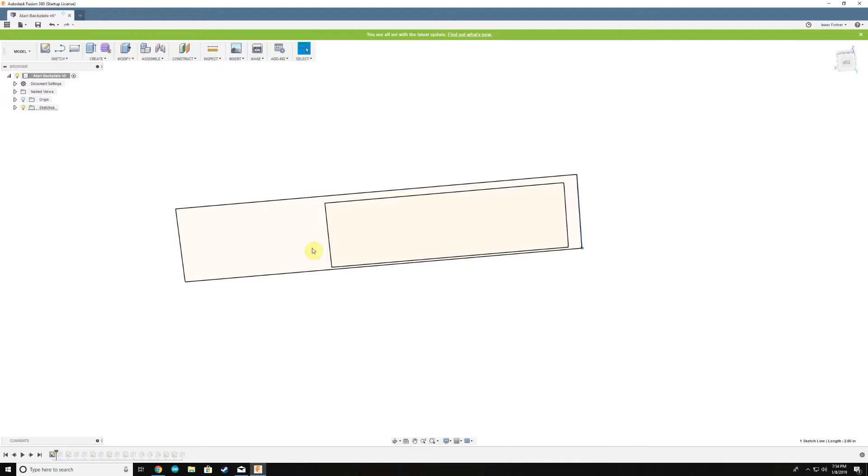Whenever I'm creating a 3D model, I always start with the easy stuff first and then build from that. So this is a large flat piece. This will end up just being a hole, which you'll see in a second. It's a good place to start from because everything kind of builds from where this plate is located.

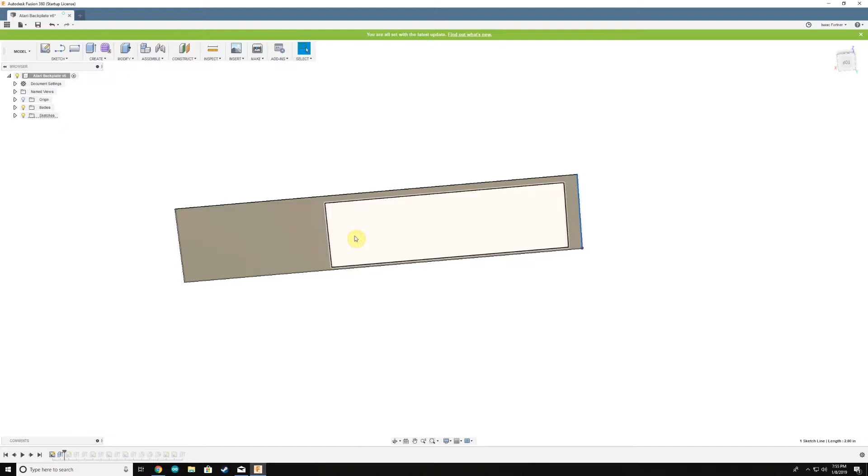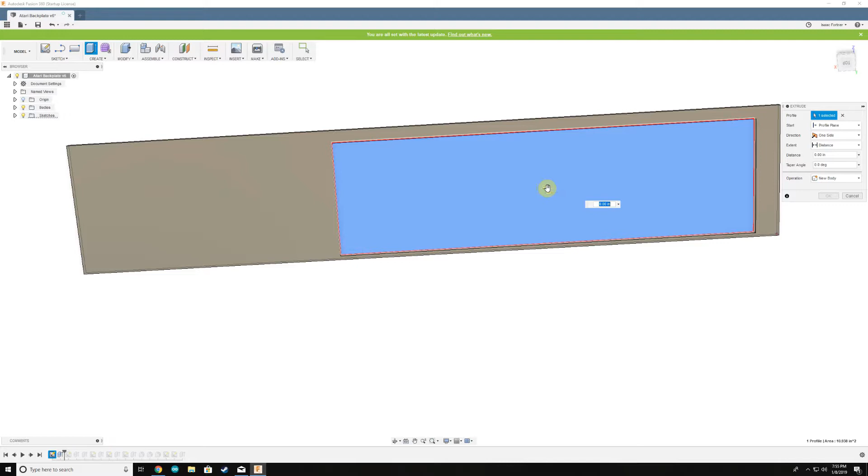So once you have a sketch, we create an extrusion. You go up here and go to extrude, and then select the body you've just sketched out. Now note, I could have selected in here - if I create an extrusion and select this inner box, you can see I can make a panel out in that, out into space.

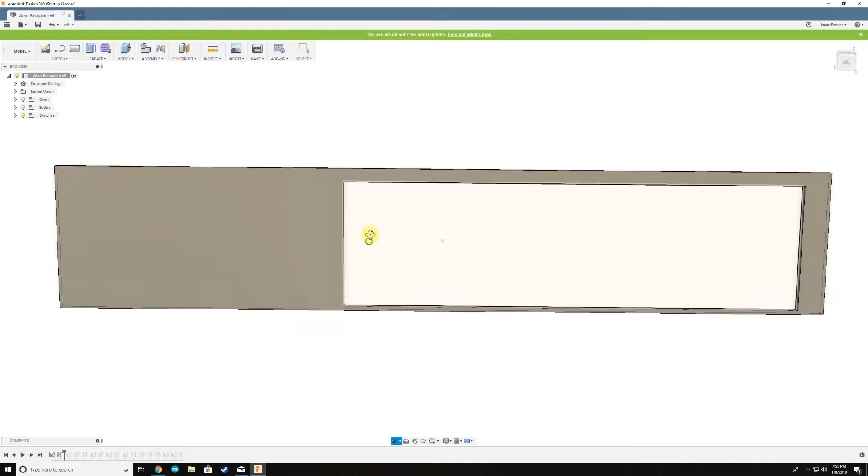However, if I pick the area here, which is really where I want my panel to be, the software will automatically assume that this rectangle is just empty space. So we'll cancel out of that. So I'm left with a panel that's perfectly sized for the I/O panel.

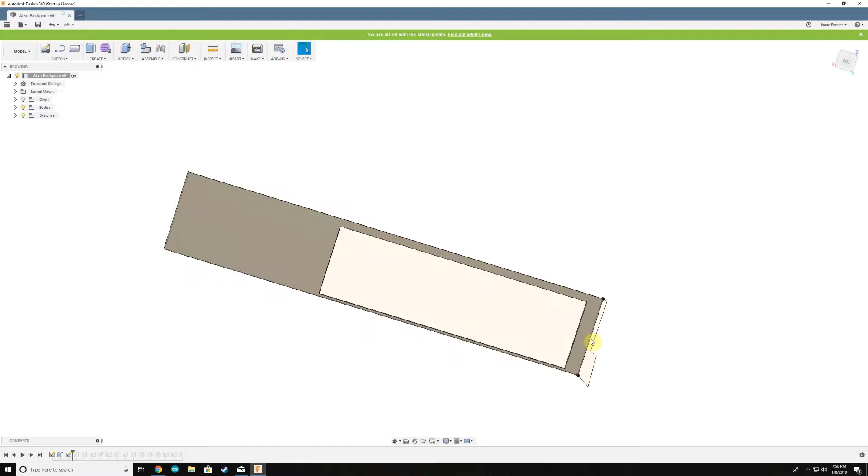So from here, I need to fill in the sides. So I went and made a really simple shape - let's try to spin this around. That's the other thing I'm getting used to in Fusion 360, the way their orbiting tool works is a little weird.

So the Atari itself comes down and roughly features in like this. Maybe I'll show a quick side shot so you can see what that looks like. So I start with very simple shapes here. Now the actual Atari itself has curved features and some nice radiused edges - we're not going to worry about that right now. We're just going to start with the basic raw shapes.

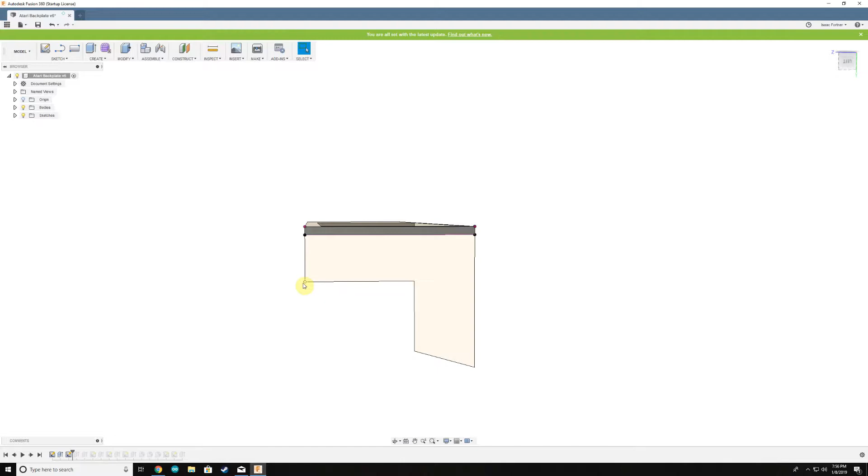Taking measurements for here, here, here, and here. Note that this is not actually a vertical line, it is slightly convex out to this point. So this point is farther from here than this point is.

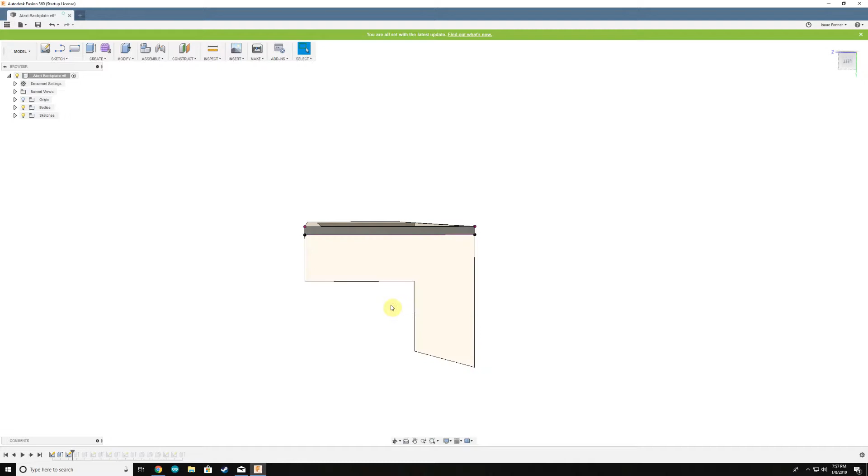Starting just using my calipers, I made the basic measurements in here so you can check the dimensions of that. If I open up this sketch, you can see the dimensions that I took from my measurements. So with the calipers, I measured 0.56, 1.41, 1.62, and 0.72.

The other thing you need to look out for when making these sketches is that everything turns black, and that means the sketch is fully defined. What I mean by that is this: if I wanted to move this wall out, you see I'm clicking on it right now and I can't move it anywhere, because it is fully defined - it needs to be 0.56 inches away from this line here, and the end of it here is 0.72 inches from this line, and the end here is perpendicular to this edge. That fully defines this line and it can't move anywhere.

Now if I delete this, you see that this turns blue. Now I can drag this around, because the software doesn't have any limits on where it can be.

So you can kind of think of this in terms of stop blocks on a car. If you want to keep the car from rolling away, you jam blocks in the wheels, and that fully defines it and fixes it in place. The dimensions are doing the same thing in here.

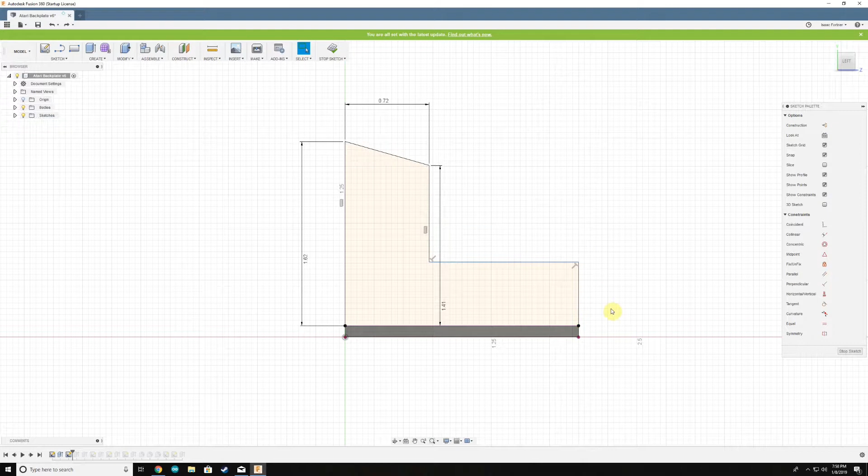So I will just undo that. You see it is black once more, and now this sketch can't move anywhere, and it won't have any unintended movements later on, which will be important.

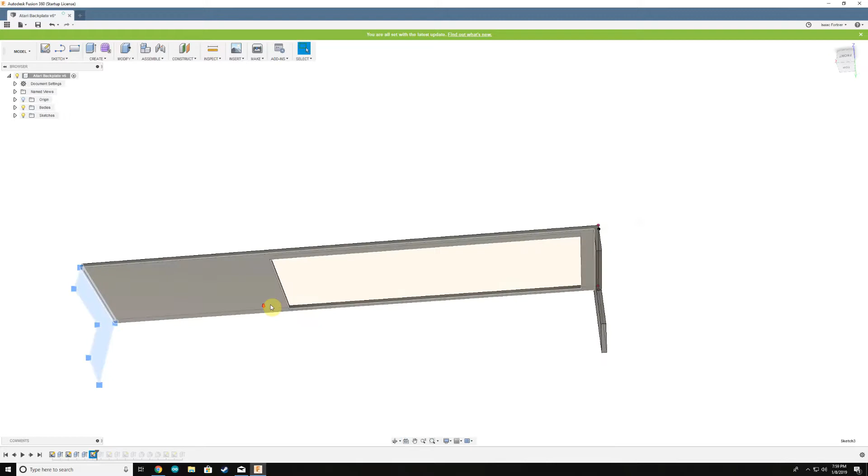So now we'll jump out of that sketch, and we need to extrude this. This is done the same way as before. The next thing I did was create the mirror edge of that.

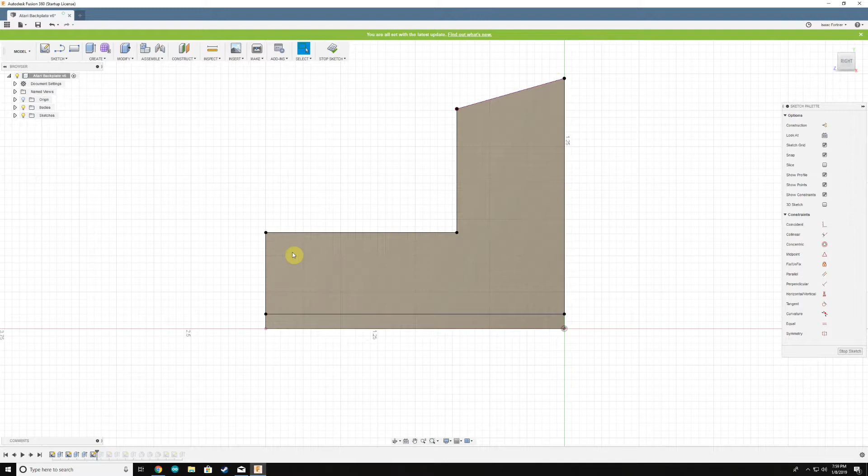So I just created another sketch, but this sketch is driven by the view of the sketch behind it. If I jump into this, you can see here that I just grabbed the points of the other geometry behind it and said be the same. So whatever changes I make to the first sketch, this sketch will follow. And then I extruded that to give it a thickness.

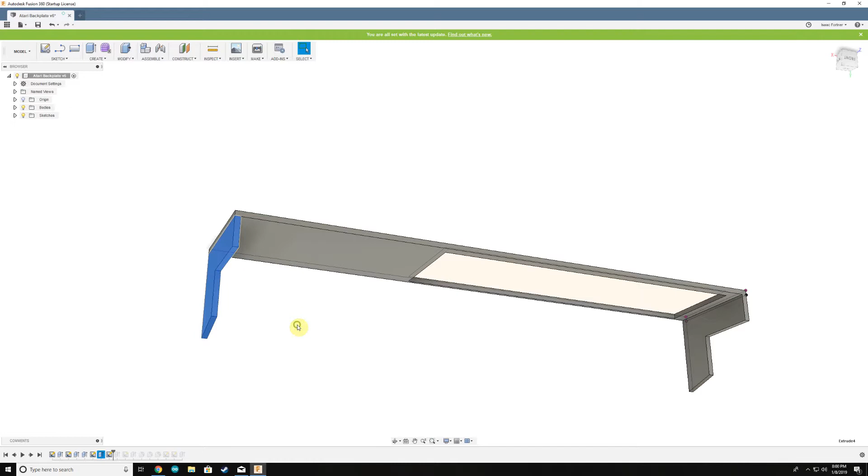As far as how thick to extrude stuff, that'll depend on what you're creating, but for this panel I chose 100 thousandths thick - that's 0.1 inches. That's a thickness that my 3D printer can do really well. It makes a nice strong part that doesn't flex or dimple in during printing. So I usually use about 0.1.

You can go as small as say 0.06, but you're getting into really thin prints at that thickness, and it's possible that you'll see some warpage in the part or breaking later on.

Okay, now that we've had the wall thickness defined and we have our two side walls here, we need to make a top and a bottom. So I made a sketch, again grabbing the sketches of the sides that I already have here, since I know that just this big rectangle will be the floor.

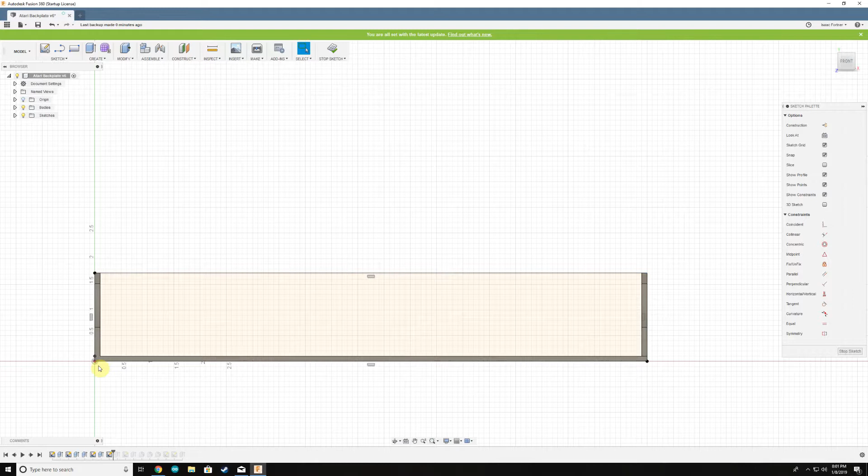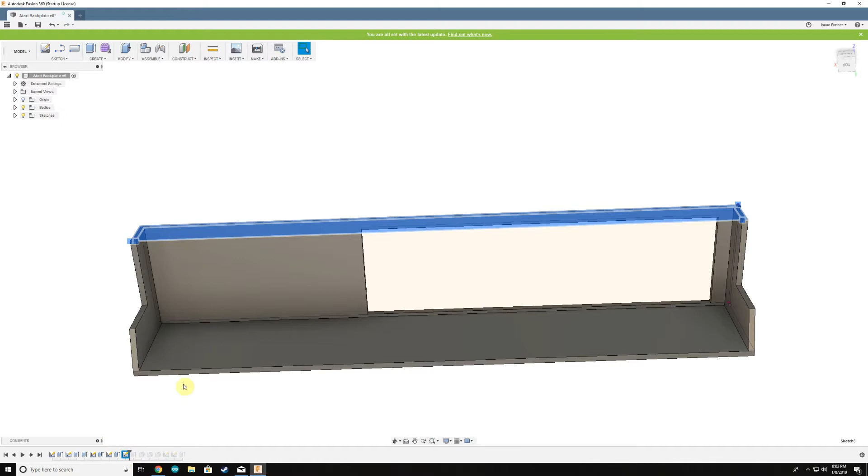And I extruded that, as you can see there. And the next part was making the top. You can see here I just grabbed the sides and the back wall, extruded that, and you can kind of see this start to take shape.

Now let's get back to the complicated features on the back of the Atari, like the curves that come around here that we didn't address earlier.

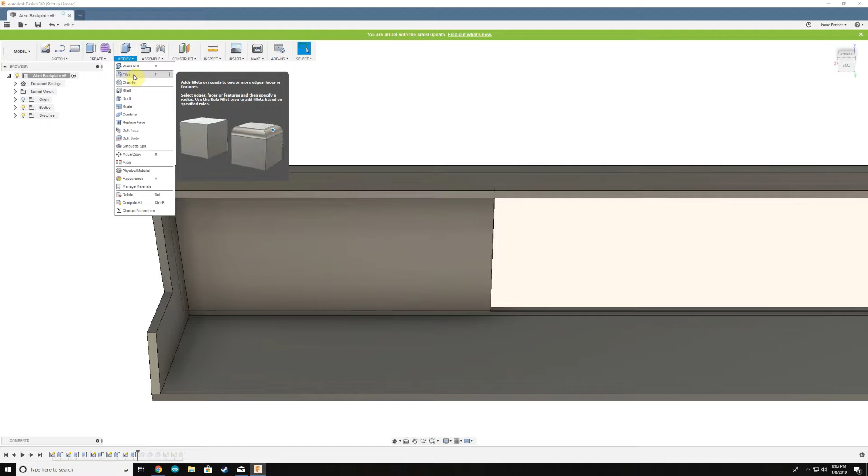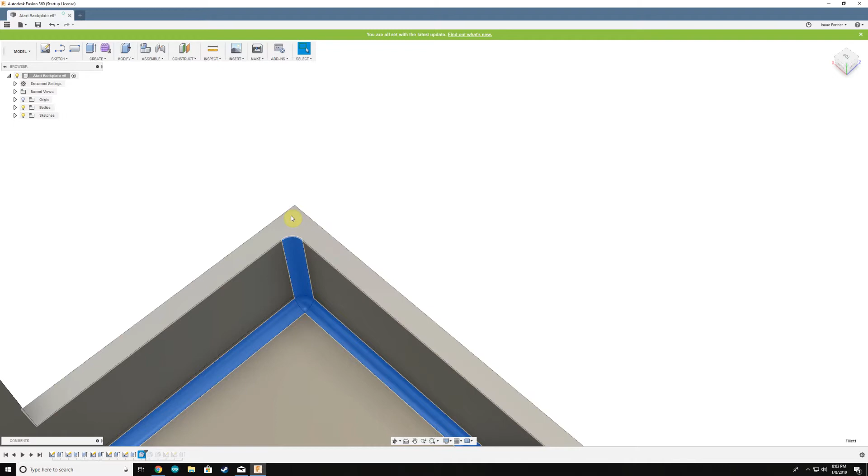So I like to add fillets on the insides of boxes like this, especially with 3D printing, because it's adding some strength in here for free. As the 3D printer moves up around here, it's going to make this nice little curve. It adds some stiffening to the corners here, so you don't have quite as much stress right in the corner, and you can add some extra thickness that's not noticeable at all, but it will really help make this a nice stiff part in the back here.

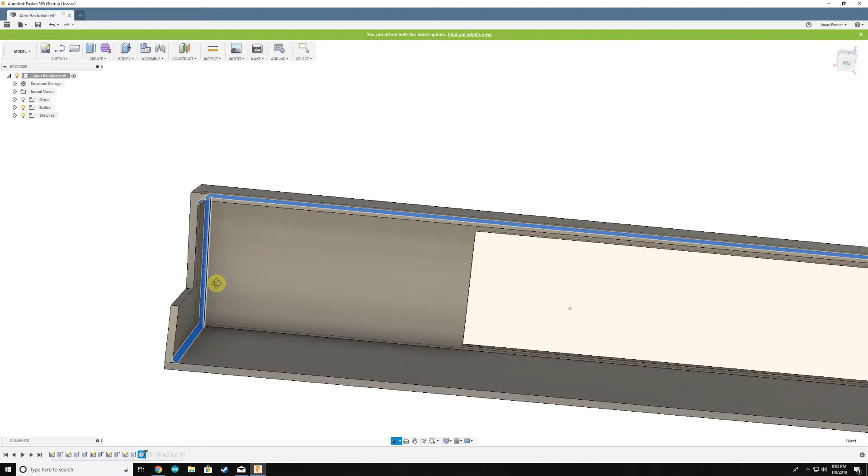So I just simply selected all of these edges, and then the tool created the radius in here. Now the actual dimension of the radius doesn't matter a whole lot. I kind of just picked nice round numbers that look tidy and don't mess with anything else. Like I didn't want it to extend over into here and get in the way of something. In this case, you can just sort of pick whatever number suits the part and you like.

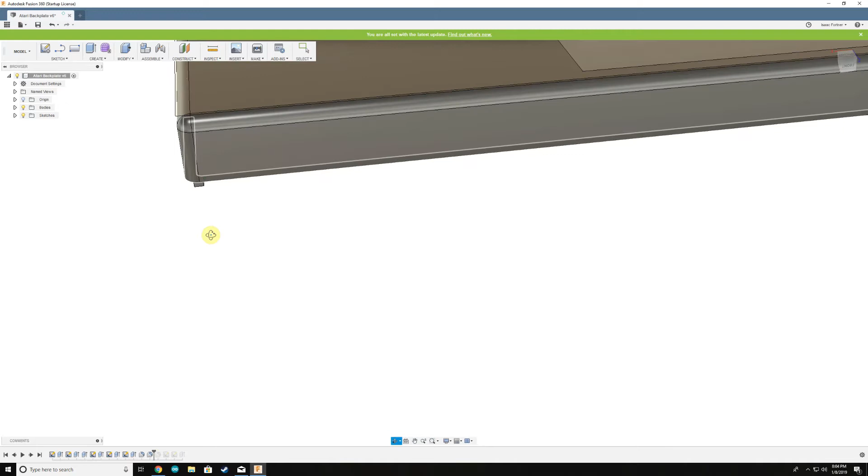And I made some curves on the outside here. This just makes the surface nice and smooth to the touch, so it doesn't have sharp edges around here. It also matches the aesthetic of the Atari that doesn't have too many sharp edges. If you look at the plastic, everything is nicely radiused out.

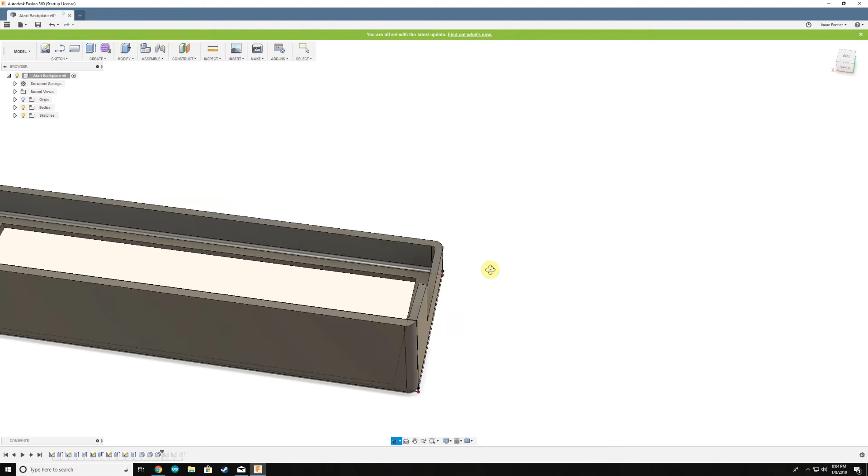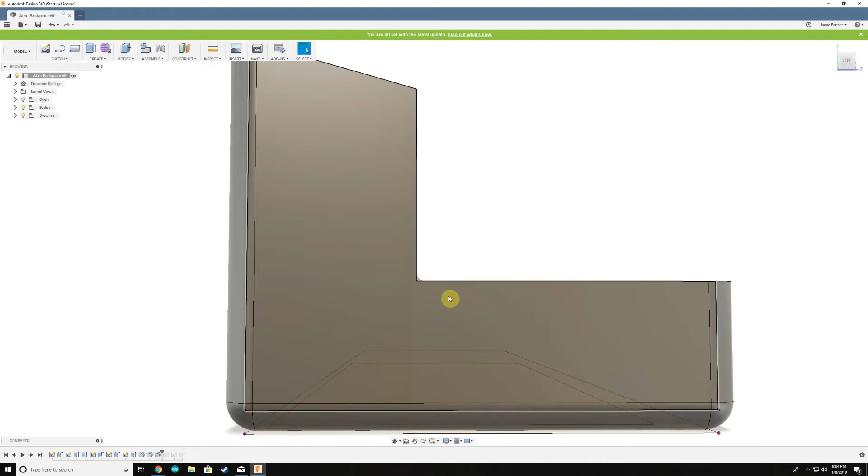Then I guesstimated what the radius of the sides was. And this is where, you can see this in video number 3 of the Atari, I printed off a lot of test pieces to try and get these edges in here exactly right. And you'll see what I did and how I did that later on here.

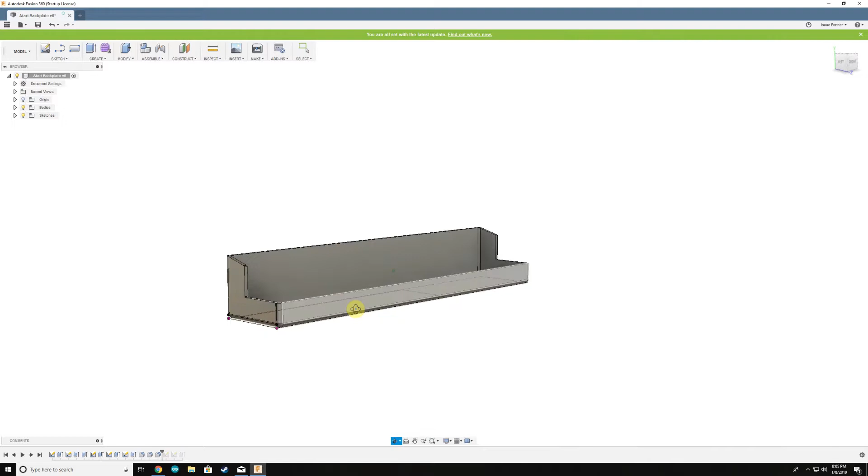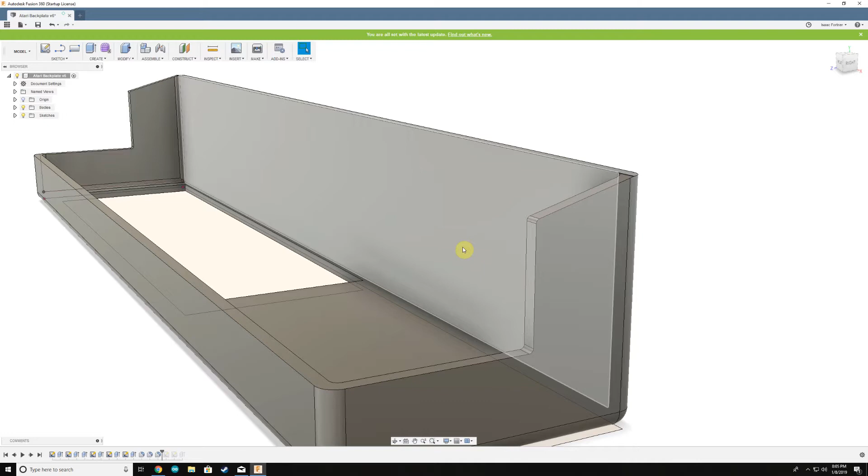So from here, we're done. This is ready to be 3D printed. And if I was all excited, ready to go, I could have gone off and printed this whole thing and probably spent 12 hours or so, and maybe it would fit, but maybe it wouldn't. And like I said, I didn't know these exact radii perfectly to mate to the part. So in this type of situation, I like to do some small test prints of just the features that I'm trying to test fit before I do the full thing.

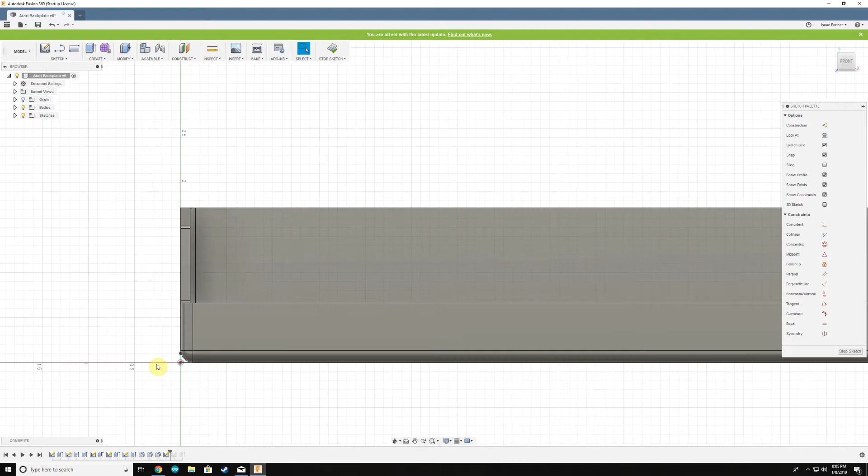So the rest of these features down here show how I did that. In this case, I just made a small box that encompassed the edge. And this sketch is a large plane that goes around the entire outside. Now the actual size of this doesn't matter, I just wanted it to be bigger than the entire part.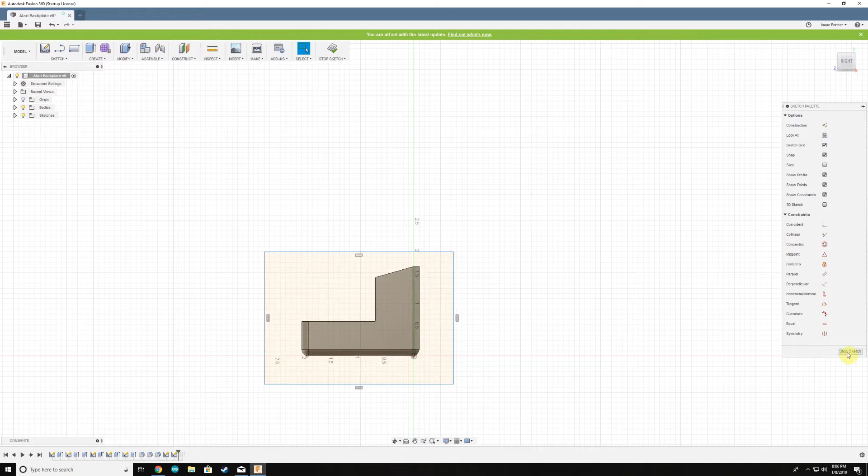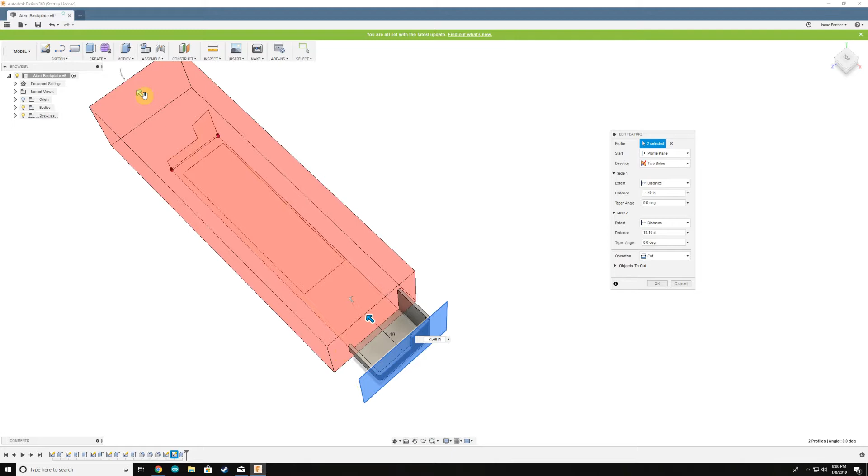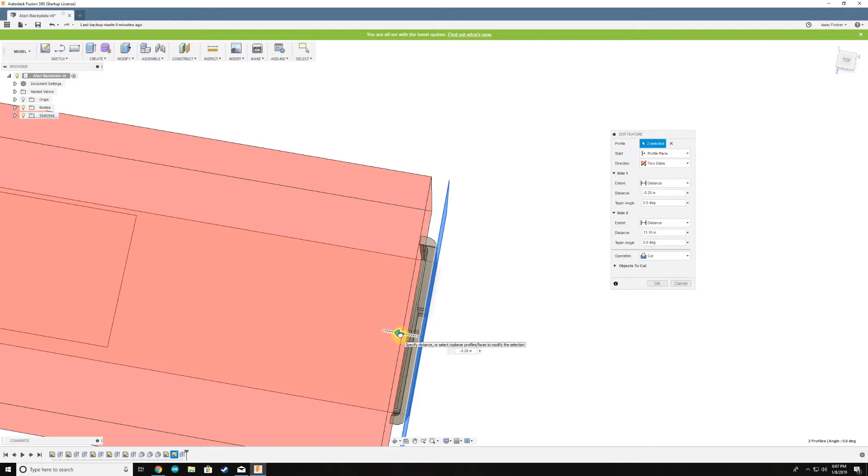And lastly, I have an extrude. So what I could do with this extrude, if I edit it here, now that I have this nice big plane that I can drag, I can say to create a cut, and I am going to slice down my part to just the little piece that I care about. So say I need a test piece to measure the edges and make sure that I get this side profile correct. I am going to take just enough of a slice. That should be fine. Hit OK.

And now all of this, you see the sketches are still out here. The data is there, but what's actually seen by the 3D printer is just this little part that will print off in a few minutes, and then I can test fit this up to the Atari.

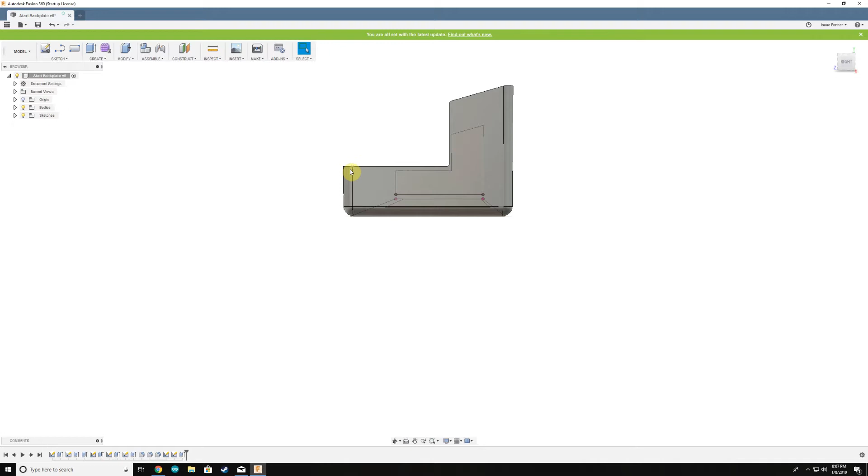And I did that for a few different pieces. So I did that for the sides to make sure that those fit snugly up against the back, and it's a good thing I did, because I did actually need to adjust these dimensions a few times. And I also did it for this back plate here, since I wanted to make sure that the computer I/O panel snapped in nicely.

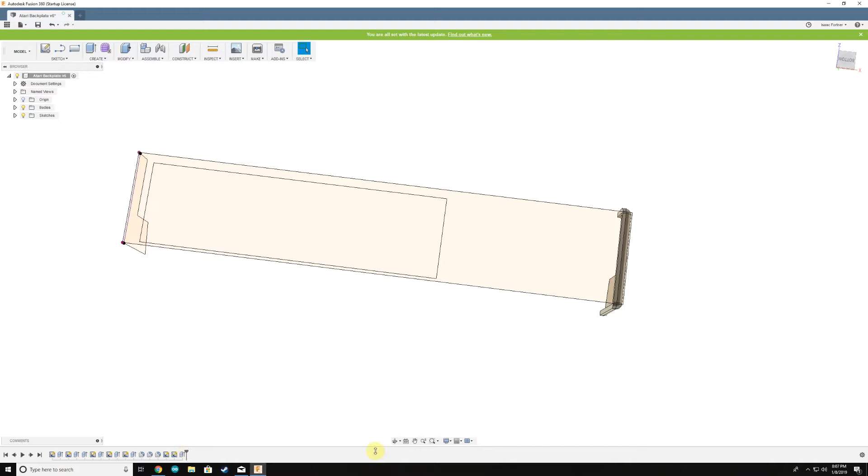The other more practical thing I ran into is this is actually a larger part overall than my 3D printer can print in one go. So let's look at what that process is. So I have my whole bracket here. All right, we are ready to print. So in Fusion 360, simply go to Make 3D Print.

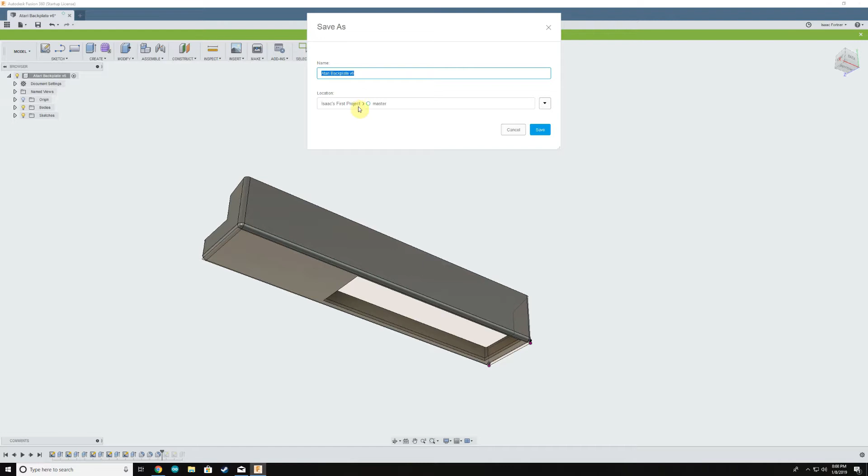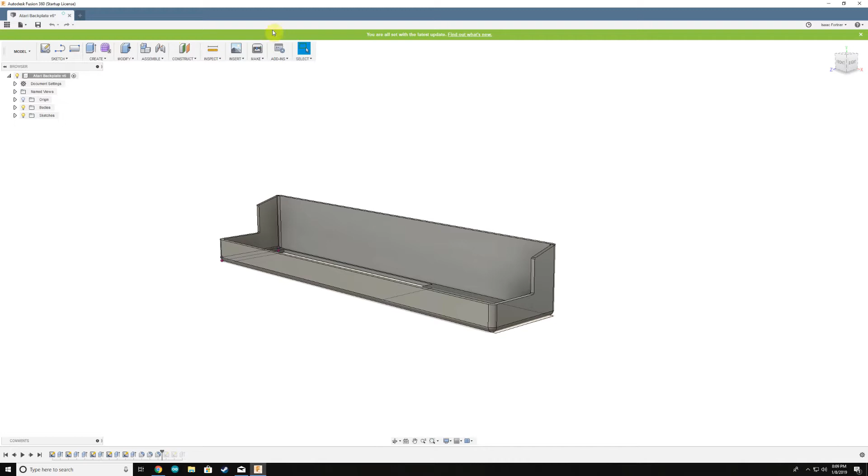This creates what's called an STL, or stereolithography file. In many other softwares, you would just go to File, Save As. In this case, because of the way Fusion 360 in particular works, that's not what I need to do to export an STL file. But 3D printers in general, the slicing software will only read STLs. Sometimes there's some software that will read other file types, but STL is the file type of choice for 3D printing. It's sort of like the raw file is to photography.

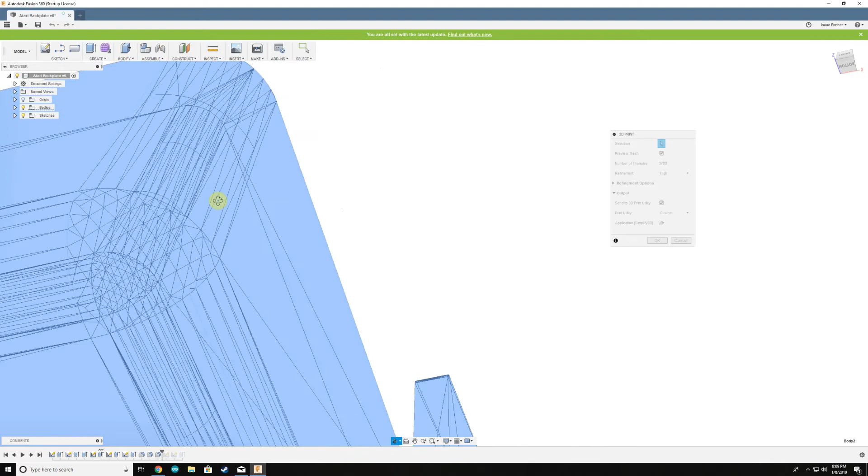So we'll go to Make 3D Print, and we need to select the part, and it will think. Now you can see all of these lines going everywhere. And if you zoom in really closely, you can see that it's actually a lot of triangles. So that's what this number of triangles is. And what an STL file is, is a number of data points in space that create triangles. So the software has converted the solid geometry into surfaces that are just lots and lots of triangles, making a nice lightweight file, and this is what our slicing software will read.

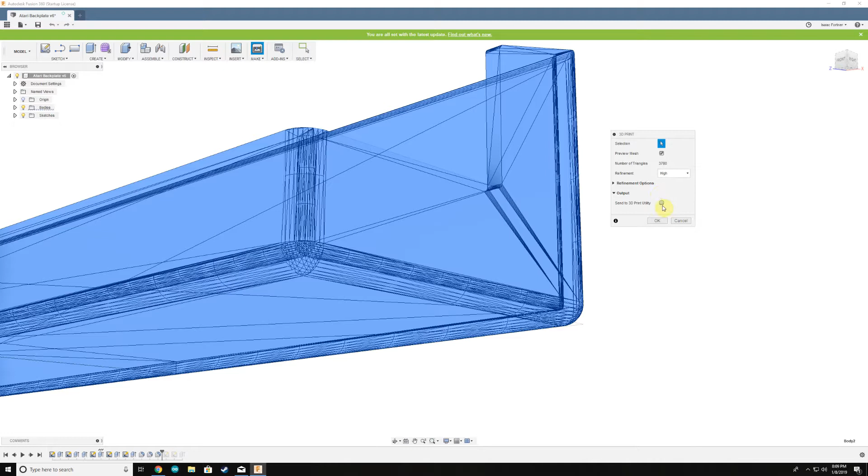So I am going to not send it to a 3D printing utility. Actually, I will. This is a nice benefit of using Fusion 360, if you can have it directly send and open up your slicing software. Note that this file alone is not enough to work with the 3D printer, unless you're using some of the built-in functions that are directly compatible with Autodesk, but my printer is not. So I'm going to have it open Simplify 3D.

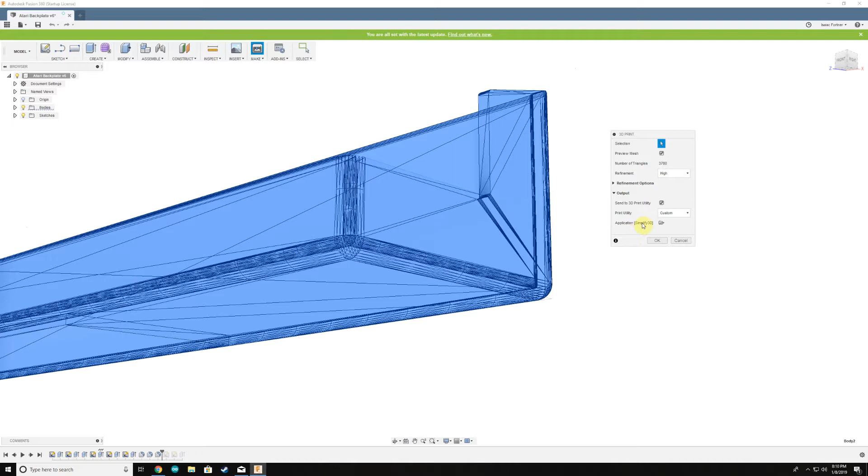So, as I said, cannot auto arrange. Largest part exceeds build dimensions. Yes, this is too big to fit my printer, but I don't care. And you can see what I did in there before.

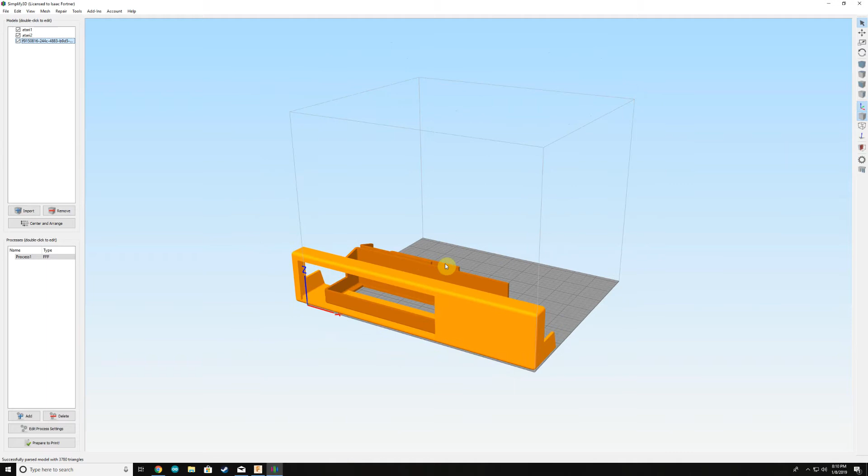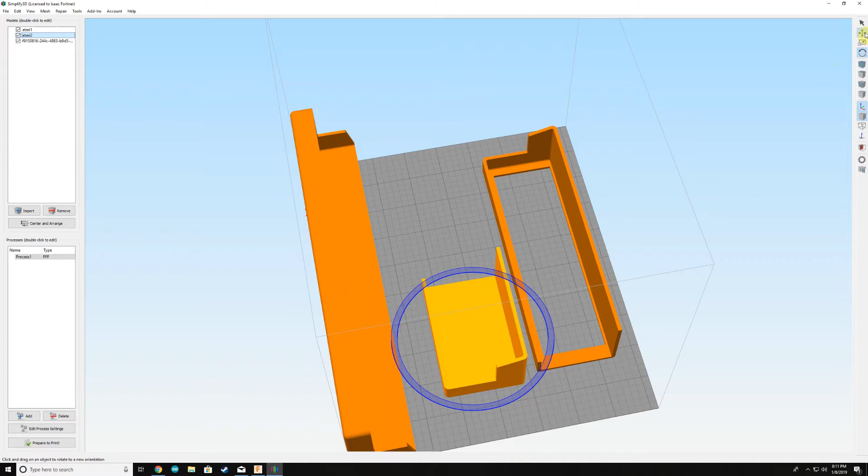So this is where I use that plane to create two different pieces. Let me move these around a little bit. Here and here, you can see if I spin this, I made a seam. And then after the fact, I can glue these together, sand, finish, and make this a nice single piece. So we'll just get rid of those for now.

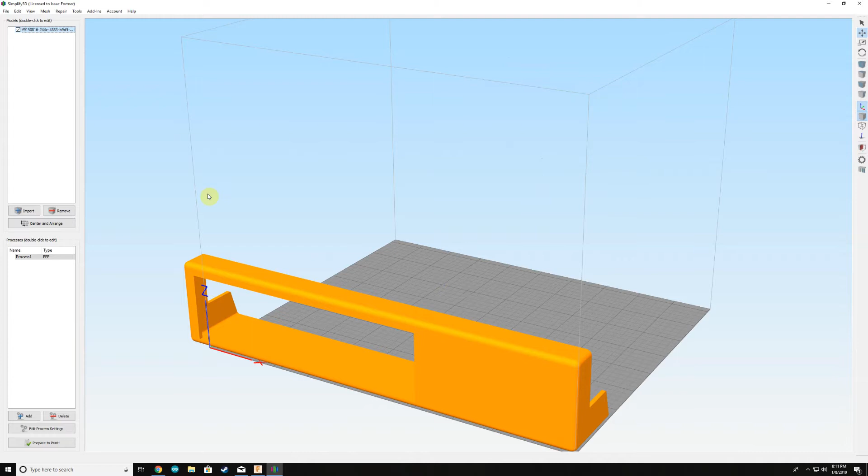Now, Simplify 3D is 3D printing software. It's a slicing software. It is not free. I think it is about $150. I consider myself somewhat of a 3D printing power user, so I benefit from a lot of the features that are in Simplify 3D. However, most 3D printers come with their own software, or you can use free software like Cura

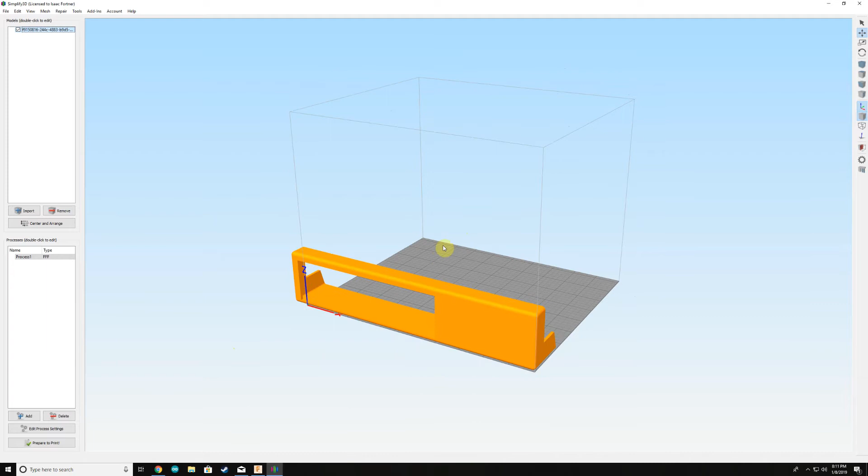or Slic3r. There's a few different options out there, and if you search around on YouTube, there are lots and lots of tutorials on how to use different slicers, and what different slicers are best for what things. Personally, I'm a huge fan of Simplify 3D, and I like the way their workflow is, and I also find that the way it creates the 3D printing commands, you end up with some very, very nice parts.

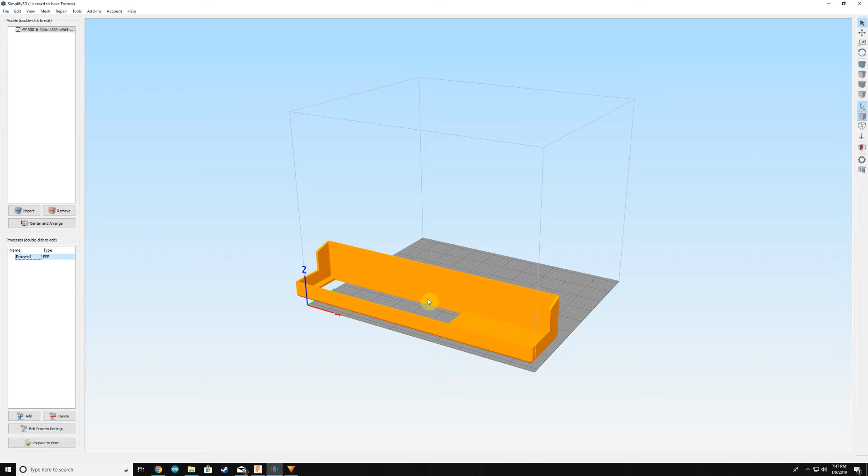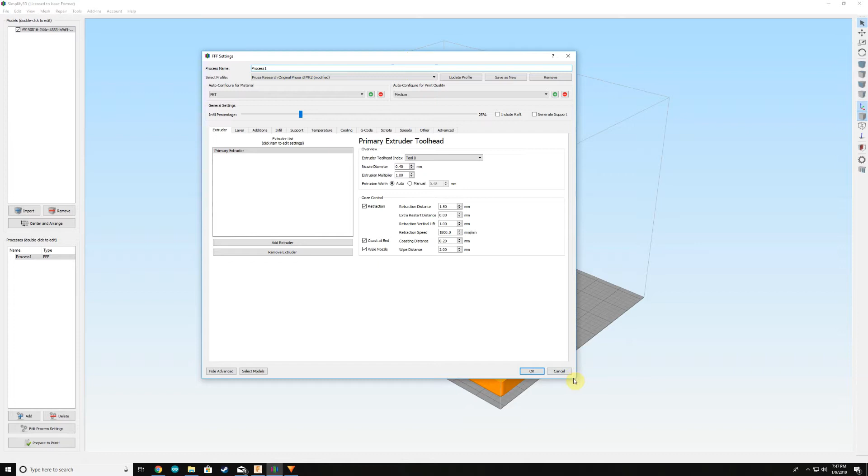So now that we have the model dropped into Simplify 3D and we've got it oriented how we want it, excluding the part that runs off the edge here, let me quickly go over some of the common 3D printing settings if you're just getting familiar with 3D printing. Now this is going to look like a lot of information, and again the software that you use might be different. I'm just going to go over some generic numbers, so don't read too much into the exact settings that I have here.

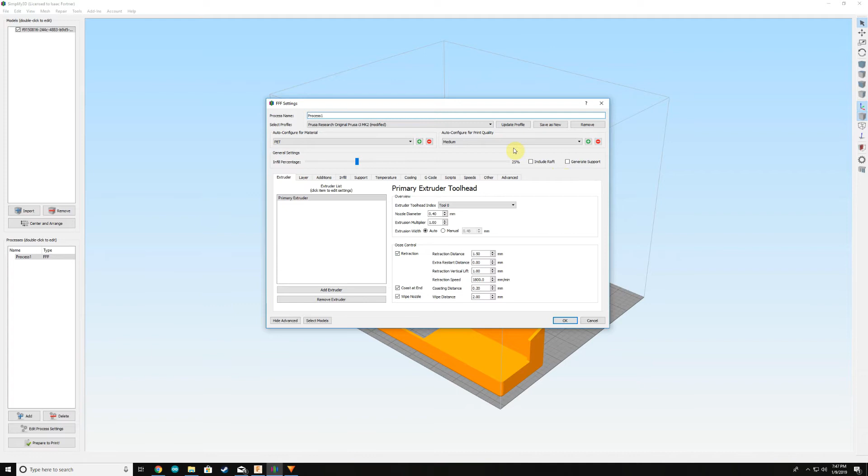There's still somewhat of an art form to 3D printing, so your mileage may vary a little bit, but I can go over some basics as far as layer heights go, infill, and support structures. So I printed this part in PET, so I have some preset profiles here that just set up a lot of different parameters depending on different materials I have. So I have this already defined for PET.

And here's what I do for sort of a typical kind of print. I'm not looking for extreme high resolution here. There's not a lot of complicated details, so I don't need to go down to the super low layer heights. So if I go to a layer here, I am printing this at 0.2 millimeters, or 200 microns. And that's pretty standard for FDM printers. I always like to have 3 shells. You can go as low as 2. I really recommend against doing 1 shell.

Shells are the number of layers around the outside. Most of the time you're not going to be 3D printing a fully solid part, and that gets into the infill, which I'll cover in a second. Shells are how much skin is on the outside before you get into the relatively hollow inner core.

However, in a part like this, you could think of this like a sheet metal part. It's so thin already that 3 shells basically just makes this a solid part. I use 3 shells for just about everything unless I need something really super strong, and then I might do 5 shells.

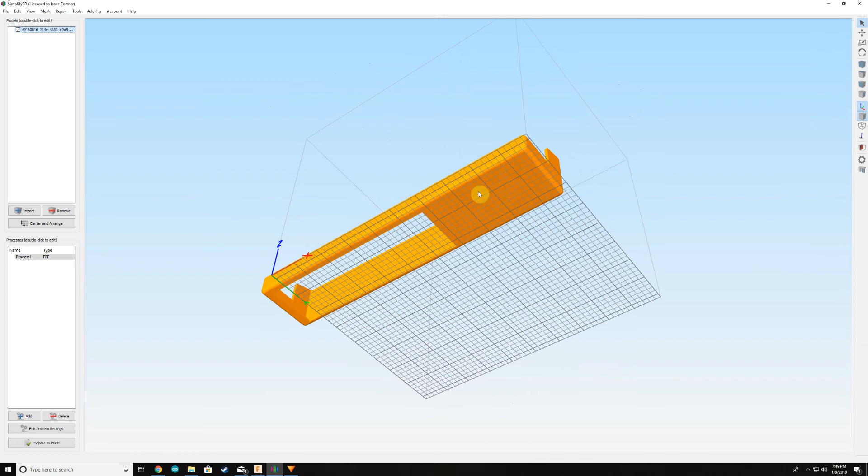So what that means is this will have 3 solid layers on the bottom, and then it will make 3 passes around the sides, and 3 solid layers on the top. There is a difference between the two, because the top and bottom will be 3 layer heights thick, whereas the sides will be 3 nozzle diameters thick. Maybe that will be the exact same overall thickness, or maybe not.

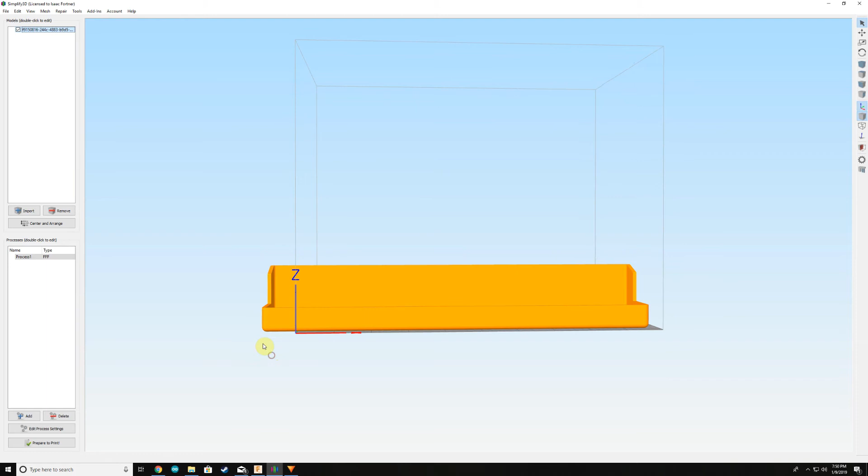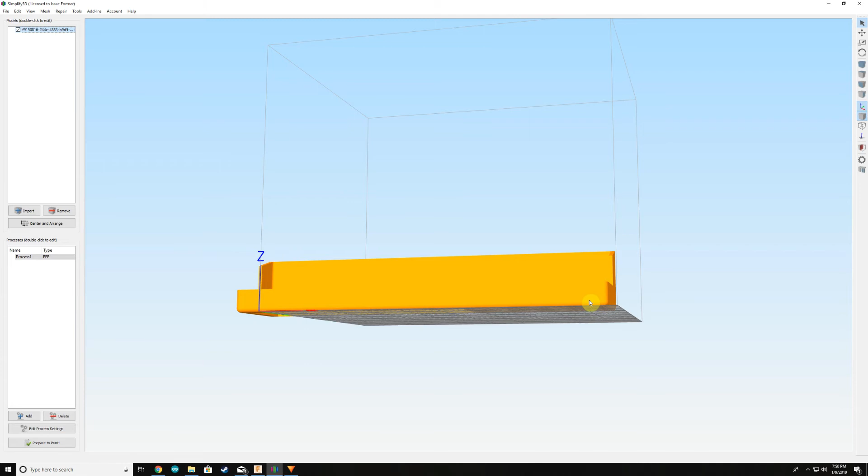My nozzle is 0.4 millimeters wide, so with 3 shells I'm going to have walls based on that, but then with layer heights of 0.2, that means I'm going to have 0.6 millimeters thick top and bottom. So you could end up with some differences there. In reality, you're not going to notice a difference, but if you're really digging into the strength of a part, it might matter.

The next thing is infill. I typically use about 25% infill, which some people might find a little aggressive or not enough, but it's a good average. I use it for just about everything. It's a good balance between strength and speed.

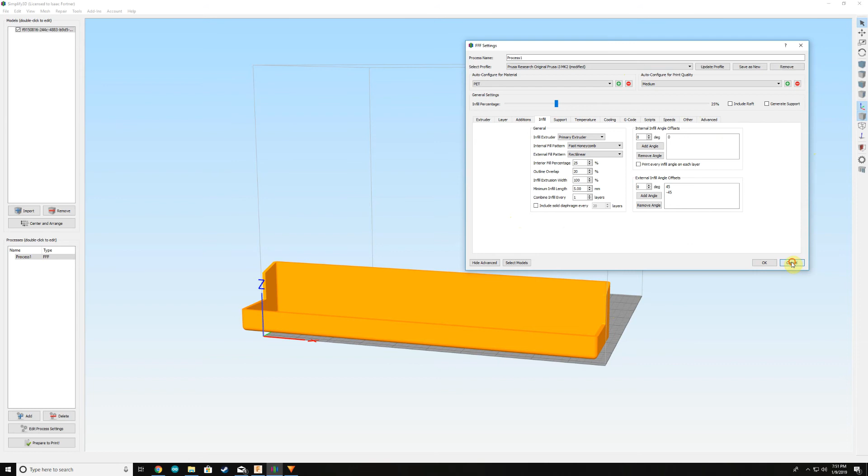Supports - this part right here I purposely oriented in this way so it will not need any support structure. We don't have any overhanging features.

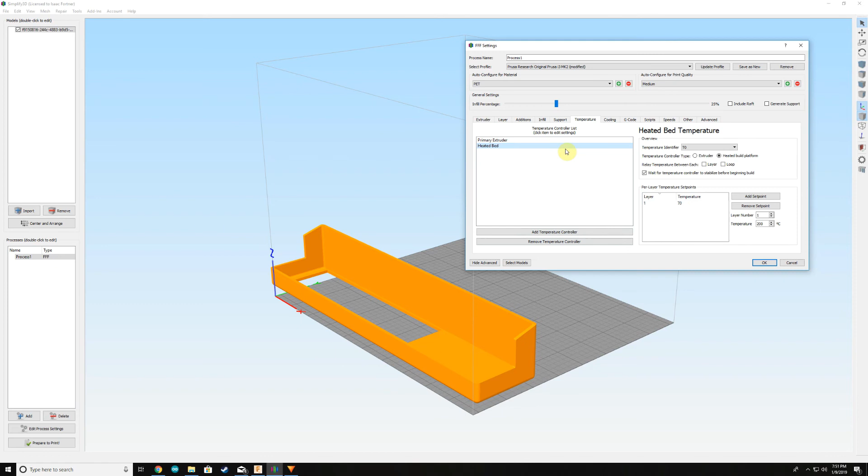The temperature that I like to run PET at is 240 Celsius, and I run a pretty hot print bed at 70 C. Actually, even hotter would be better, but I tend to run into thermal overloads on my print bed if I go up beyond like 80 degrees Celsius or so. So I stick with that.

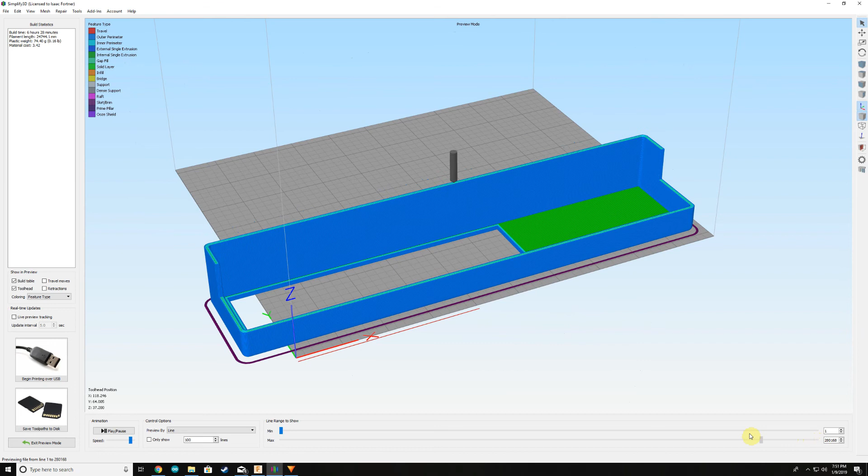So let's take a look at what this looks like in the end. Here is the calculated path and sort of a sneak peek of what this will look like after being printed. Let me cut down through the bottom here.

So this is what I mean by infill, and this just saves on filament and speed. I'm not really losing that much strength in the part by having this honeycomb infill in here, and it really speeds up the printing process.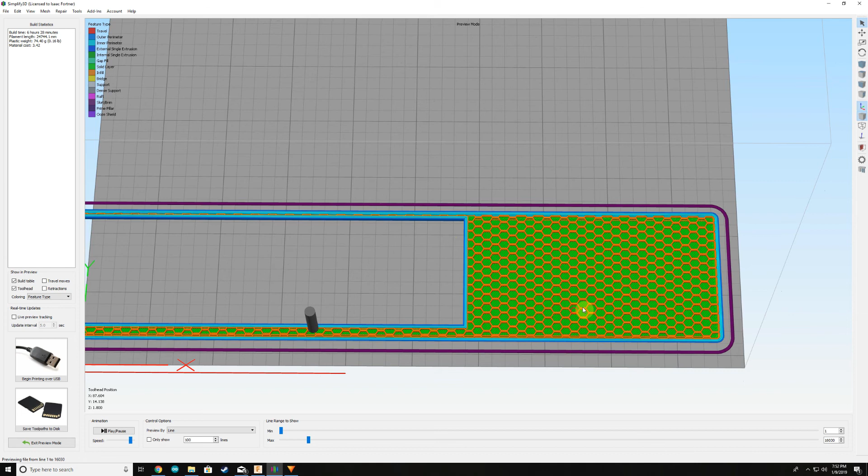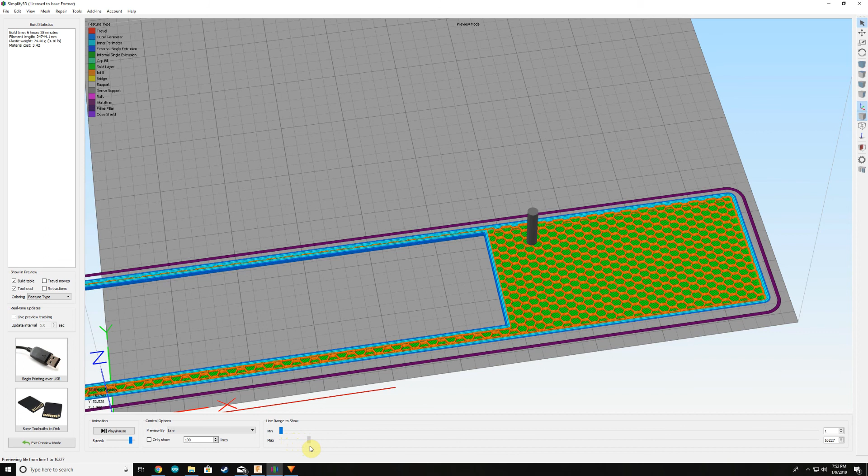But as far as the shells go, as I said earlier, if I scan down here, you can see how it prints 1 solid layer, then comes back and does 2 solid layers, and then 3 solid layers, and then it starts doing the honeycomb. Then the top part will come up: 1 layer, then 2 layers, then 3 layers. And for the sides, you can see 1, 2, 3 shells along the sides there. So that's what I meant by the shells features.

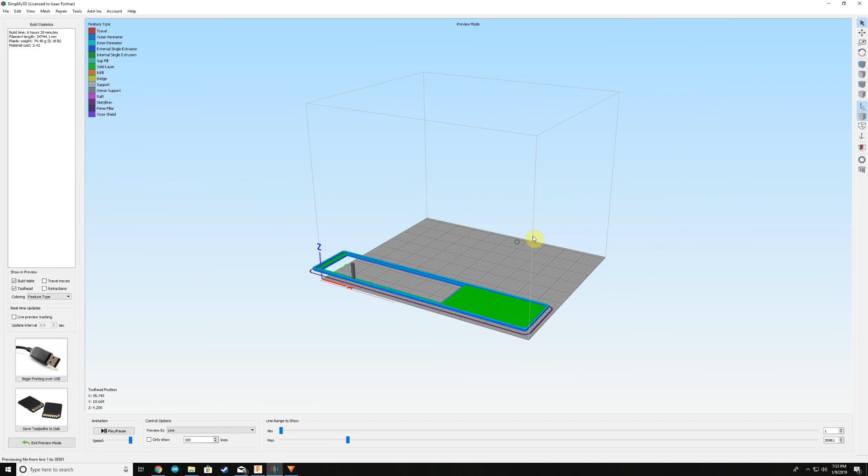You can see this just represents the printer head moving back and forth. And it estimates this will take about 4 hours 20 minutes and use a bunch of filament.

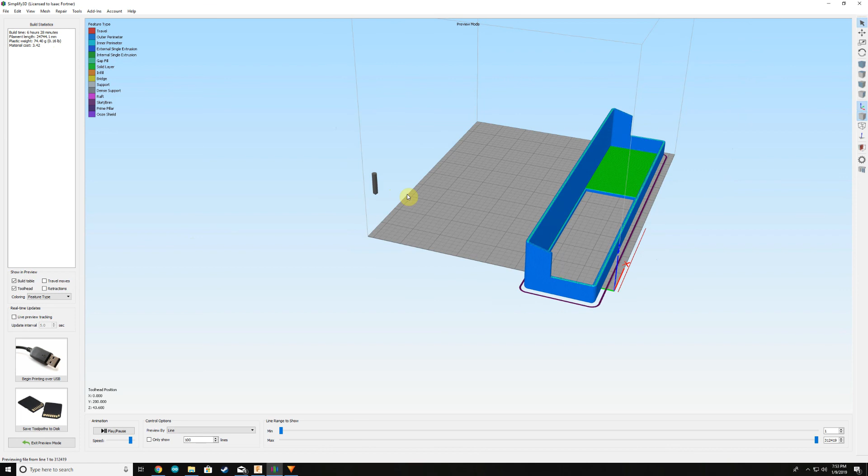So now that we have our printer file ready to go, we simply save toolpaths to disk, and I can save this to an SD card and plop it in my printer. I use a printer server that I'm not going to cover here because it's beyond beginning 3D printing, but the majority of home 3D printers have an SD card port, so this just lets you save it to an SD card, and then you can plop it in your printer and you're ready to go.

And that is the basics of how to 3D print. Start from an idea and how to 3D print things.